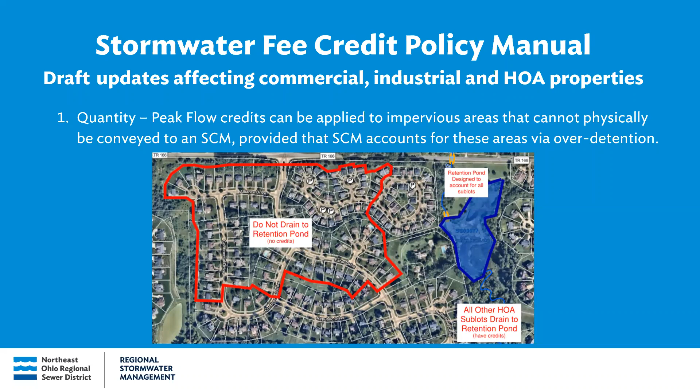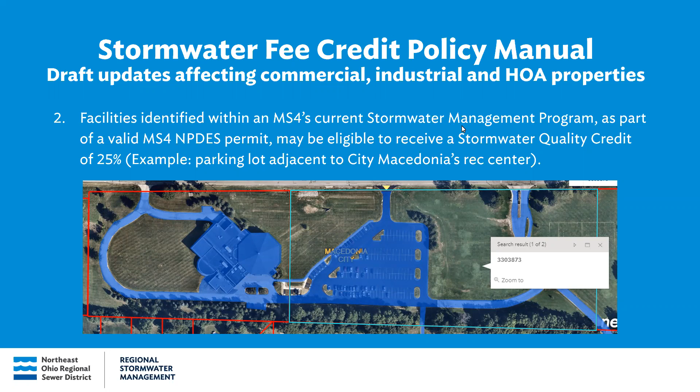This second update here, we currently have an industrial NPDES quality credit that allows companies to get 25% for complying with their permit requirements, that's that 25% credit on their fee for stormwater. We're going to be copying that program over to the MS4 NPDES permit holders, which would be municipalities, and it would be specifically for municipality owned properties that are billed. Most municipally owned properties aren't billed, they're city hall or service yards because they don't bring in funds, they're like nonprofit, they aren't billed. But there are some situations, very few situations, where municipal properties are billed. So for those properties, because you have your MS4 program, we're going to be looking to have a 25% credit. This is going to be a quality credit, and you will have to apply and renew annually. If you need more information, or think you might have properties in your municipality that would qualify, you can reach out to Chris Hartman at our office and he can help walk through that process with you.

Moving on to the report a flood tool. We pitched this at the last WAC meeting, if you recall. This is an easy fillable form that allows for data collection related to overland flooding or property flooding. This is something that service directors, engineers, office workers can all fill out. We have various forms of this, online forms, paper forms, Excel forms, you name it, we have it. We have this so that we're trying to collect data in a uniform manner across the service area.

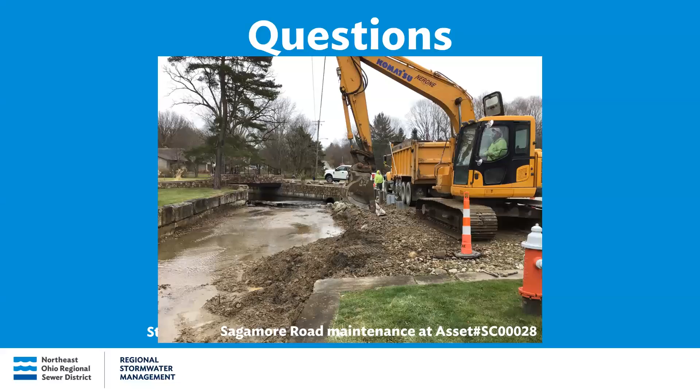Some background on Plum Creek: it's a headwater stream tributary to the west branch of the Rocky River. It starts in Brunswick, flows through Columbia, and ends at Olmsted Falls at one of the public parks. The sewer district maintains 3.6 miles of Plum Creek within the service area.

Some watershed characteristics: it drains 18 square miles, which is pretty big for a headwater stream - that cutoff is really at 20 square miles. 27% of the watershed is forested, 20% urban, and only 4% impervious, which is really good for that watershed.

Some background on how Ohio EPA assesses water quality standards - it's basically a completely biological approach, meaning the fish and the bugs that live in the stream. The fish have their own metric called the IBI, or Index of Biotic Integrity. The macroinvertebrates, or aquatic bugs, have their own metric too, called the ICI, or Invertebrate Community Index.

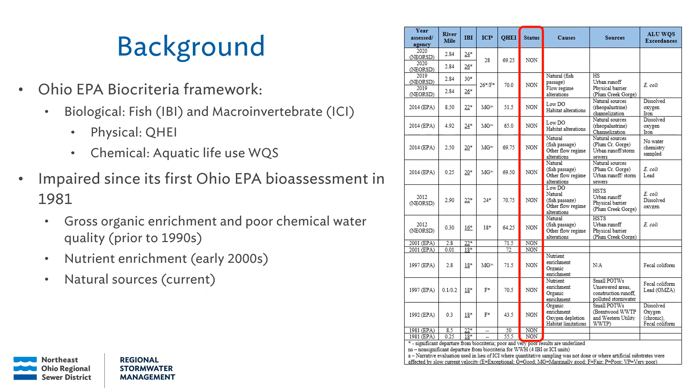The water quality improvements on Plum Creek have been pretty drastic. The organic enrichment problem was really dealt with starting in 1983, when the sewer district and the US EPA started regional planning efforts to expand our Southerly wastewater treatment plant westward. Our southwest interceptor, a really big trunk sewer, collects all your local sanitary sewers in your service area into one big trunk sewer that goes southerly into Cuyahoga Heights.

When that reached out and went online in 1997, it redirected flows from the Brentwood, Western Utility, and ODOT Park 339 wastewater treatment plants, eliminating over 500,000 gallons a day of treated wastewater to Plum Creek, which is significant since Plum Creek is a smaller stream. There's currently only one wastewater plant remaining on Plum Creek, called the Plum Creek Wastewater Treatment Plant. It's a real small plant, with an average design flow of 0.04 million gallons a day. Compare that to our southerly plant, which averages over 100 million gallons a day, so that's really small.

So that took care of organic enrichment. Moving forward, nutrient enrichment was really taken care of with the lead from the Ohio EPA. They created a nutrient-based total maximum daily load in 2001 for the creek based on the results of their 1997 assessment. What they did with that total maximum daily load is put restrictions and made that one wastewater treatment plant start reporting their nutrient levels. When they reported high, they were able to limit them to reduce the nutrient loading to Plum Creek. Our 2019 and 2020 monitoring by our environmental assessment section has demonstrated that Plum Creek is now meeting all the nutrient total maximum daily load target criteria. So both nutrient enrichment and organic enrichment were taken care of prior to 2019.

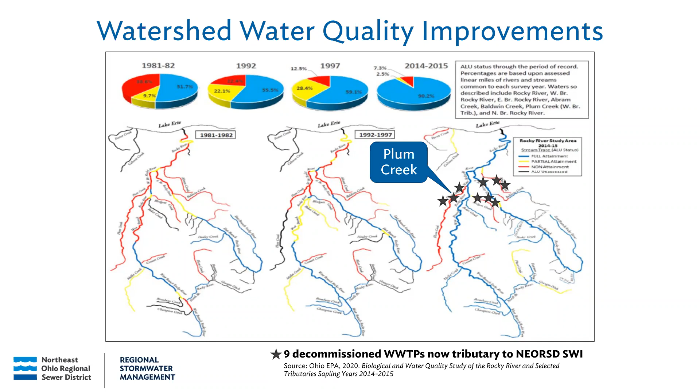5 of the last 6 assessments dating back to 2014 were in attainment for this metric. So we're halfway there - the fish aren't meeting, but the macroinvertebrates are. These bugs, when they hatch into adult life form, can fly above the fish barrier, which is the Plum Creek Falls, which I'll show you in a minute. They can fly up there, recolonize, and start a new population. They're not limited by any barriers.

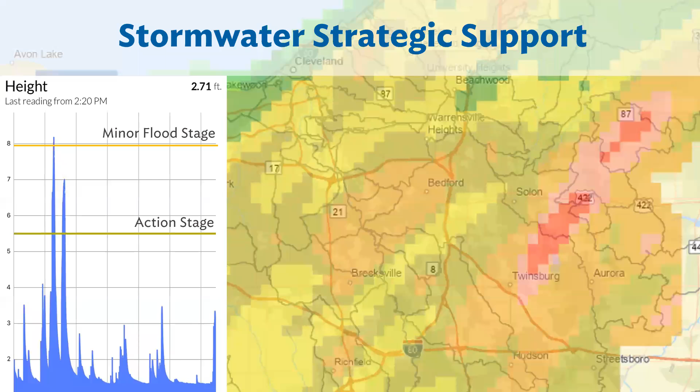So I have two topics I'm going to be covering with you today. The first is how we use monitoring data, or various types of data, to support our urgent storm event response. The second is how we've been taking completed master plan stormwater models and extending them into the local system to help address local issues while looking for regional opportunities.

Regarding the first topic, as you've learned through different WAC presentations, we've covered the steps involved with our urgent storm response. Today I'm going to talk about the different types of data. All this information is useful to track both what's coming, what happened, and where we're going during the course of a storm event.

Some of the data we use is rainfall data. We have 30 rain gauges throughout the district service area. Our 30th was recently installed at our Westerly treatment plant. We also have a lot of gauge-adjusted radar data. This figure on the right shows the coverage area, a little over 1,300 square miles, covering not only the stormwater service area but also what drains into it to support our analysis.

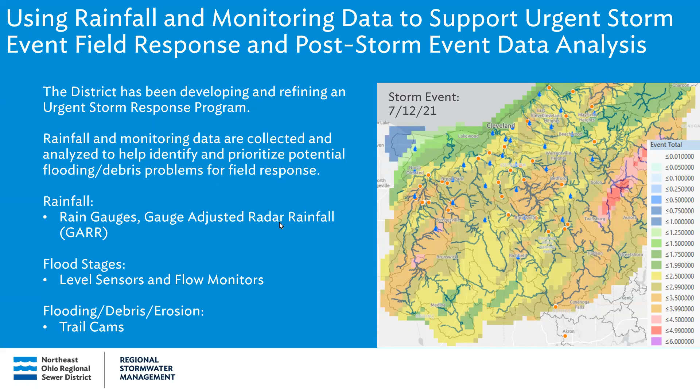We also have a number of monitors installed by the USGS that we support and fund, our own district monitors, as well as some outside vendor monitors. We'll go over that as well. And lastly, we have a number of different trail cams that we use to collect photos and compile those into videos to help us understand flooding, debris, and erosion.

Regarding the district rain gauges, once again there are 30 installed. We're able to quickly extract that data and process it into what are defined as recurrence intervals, for the different durations shown on the left: the peak 5-minute, the peak 10-minute, up to the peak 48-hour duration of the peak rainfall amount that occurred.

We compare that to two different references: the Huff and Angel series of rainfall frequency for the Midwest, done in 1992, and the NOAA Atlas 14, done in 2004, to give us a good idea of anything from the 2-month recurrence interval up to the 1,000-year recurrence interval.

We do that for each rain gauge for each storm event to give us a sense of where we have high intensity rainfall versus heavy rainfall. High intensity is typically at least 1 inch per hour or more, and heavy rainfall is closer to at least 2 inches over a 24-hour period.

You can see on the table for the Westlake rain gauge that for the shorter durations, the 5-minute to 1-hour, there were relatively small amounts of rainfall that didn't statistically jump out. Whereas for the longer period, particularly the peak 12 and 24-hour, it was closer to a 5-year recurrence interval, which is significant. The figure on the right also shows the cumulative total of that rainfall.

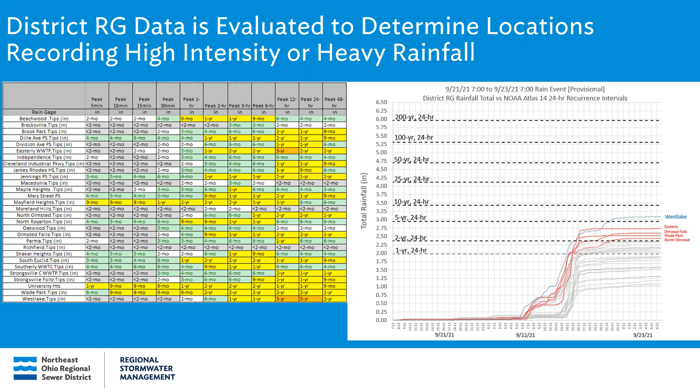This gives us a better sense of how the system responded. As you can tell with the Westlake line graph, it shows how much rainfall occurred compared to that 5-year, 24-hour total, and you can see when most of it occurred during that storm event.

In addition to the rain gauges, there's this gauge-adjusted radar rainfall, which the district has been collecting since 2016. We have 1 kilometer by 1 kilometer grid data collected at 5-minute intervals. Similar to the district rain gauge data, we compare all of those for equivalent peak 5-minute to 48-hour time steps, comparing to recurrence intervals to answer the same types of questions.

On the figure to the right, this is for the peak 30-minute duration, and colors closer to yellow and orange indicate higher intensity rainfall. You can see an area on the left with some orange blocks indicating it was closer to a 10-year type recurrence interval, and it happens to be the same sub-watershed that Justin talked about for Plum Creek.

There's a USGS rain gauge or stream monitor included there, shown in the figure in the upper left, which indicates the water elevation exceeded the action stage and actually met the minor flood stage. That's an indication there was high water, possibly some flooding, which would have prompted us to do a field response there.

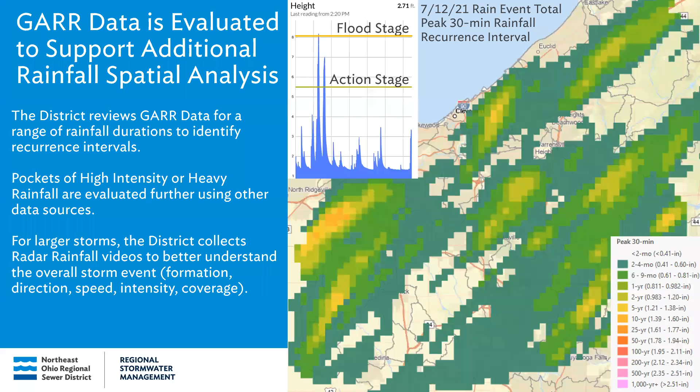With the different monitors, we have roughly 80 across the service area between the USGS, our own, and some outside vendors. We are slowly building towards getting all 80 of those to define what I think is a very useful approach that the National Weather Service uses, which is defining flood stages.

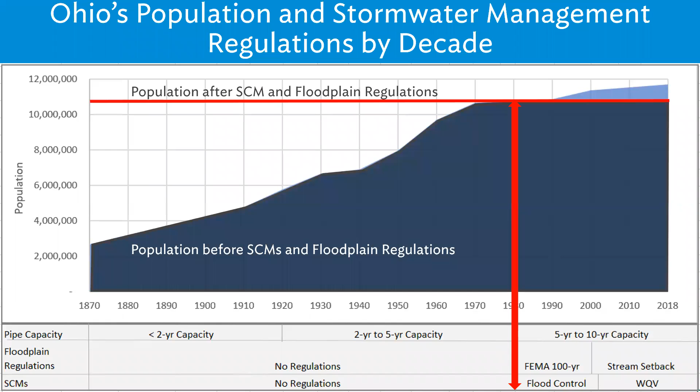Thank you. So one of the other challenges here, outside of everything we talked about, was the types of soils and the topography. It's very poor drainage soil, more silty clay, and a very flat sloped area as well. The slope itself is closer to 0.2%, 0.12% in some areas, so it's a very flat area, and once the water gets there, it takes a long time to draw down.

Based upon that, and compared to our master plan model focus, we decided to do a lot of expansion to better understand the local system, how the regional system may influence the local system, and equally important, how we can develop solutions in the local system that might benefit the regional system. The table on the right gives you an idea of the level of detail the master plan model was originally at versus where it's been extended to date. The model catchments were roughly 76, with an average catchment size of 33, which is a very good size.

But as you can see to the right, we wanted to understand at both the catch basin level how the system was responding, as well as at the parcel level for the non-residential, commercial and industrial areas, the potential solutions we could develop as part of this project. From a modeling perspective, on the conduit size, we had a little over 53,000 lineal feet in the original model, and we extended that to nearly 250,000 feet.

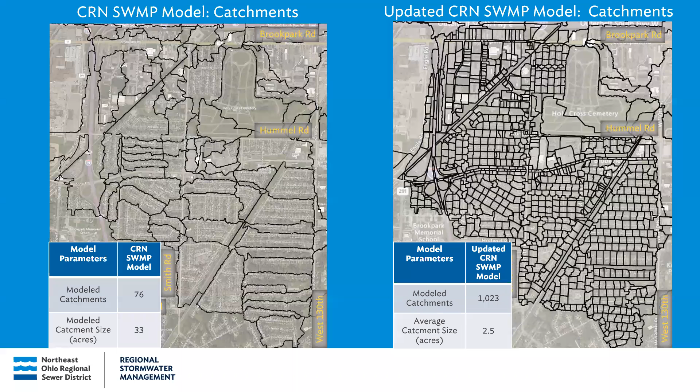The figure on the left shows the hydraulic model extents, most of which was primarily the regional system. The figure on the right gives an example of how we extended that further into the local system, not only to understand some of the original projects the city had proposed, but also some ideas of additional projects. I'd like to emphasize how cooperative the city was with providing drawings, very open to different types of solutions, and something we're working together on.

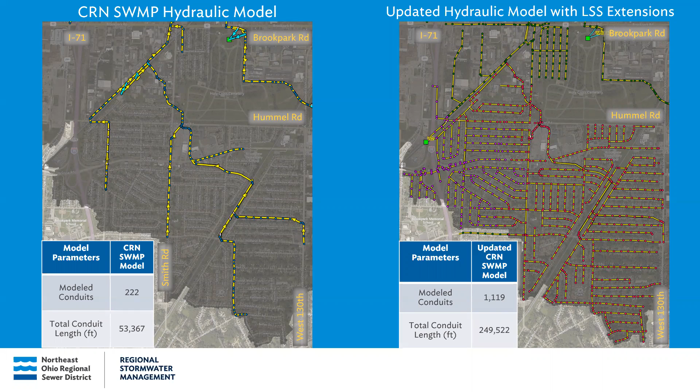Next slide, please. I think the bulk of the projects or potential solutions will really be focused more on storage, as I mentioned before, because so little of it was required back in the day. There are three types of storage solutions we're generally looking at.

There's the inline basin that you'd normally think about, but for that to really be successful, you need to think about the elevation difference to allow ponding without impacting the local system, which, as I mentioned, is a very flat area here, so it's very limited.

There's also some conventional offline storage being looked at, but the challenge there is you also have to have enough area to divert the new storage into, and with this fully developed, heavily culverted area, that's once again another challenge. And then finally there's the more decentralized approach with potential underground storage and bioswales.

It looks like there's great application there, but it's both technically and financially challenging. With an area like this though, it looks like it might actually have the biggest potential, and it's an area we're currently exploring.

So where we're currently at with the model is we've got three different monitors in the ground recording different stages, and we're getting some field response during the bigger storms. We're near completing the model calibration, and then we'll be moving into problem definition and alternative development.

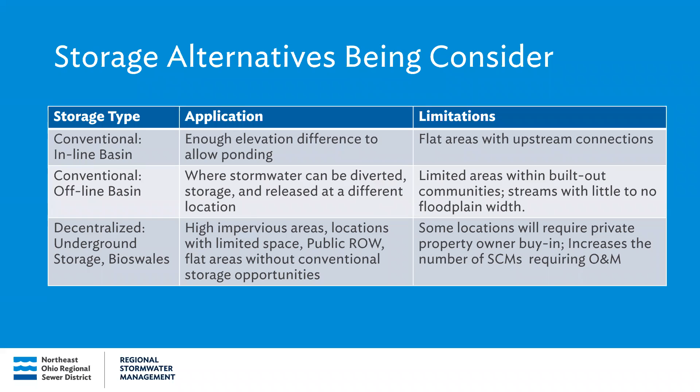Next slide. With that, I'll answer any questions there may be.

I do not see any questions right now, George.

Okay, with that I will hand it off to Rachel Webb, one of our project managers, to give an update on the Cuyahoga River South Stormwater Master Plan.

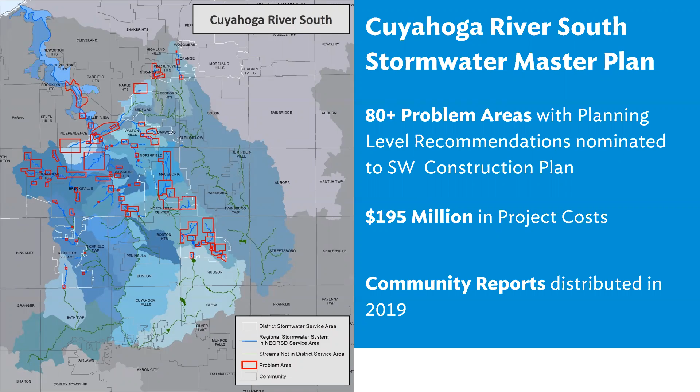The community reports were distributed way back in 2019, seems like a decade ago. With that being said, it's not a plan that we've put on the shelf and walked away from. If you move to the next slide, we actively use that plan to funnel projects into stormwater construction planning.

Those projects are scored and ranked. With the projects outlined in the master plan, here's just a snapshot of a couple we have active in this Watershed Advisory Committee area.

So a couple of Chippewa Creek projects there, one looking to start construction next year. Excuse me, one that is in the process of acquiring easements and soon to resume design. They paused to do that easement acquisition before finalizing design.

And then you have Brandywine Creek down in Hudson. This is a project being led by Hudson, and it's looking for construction in 2022. And Bear Creek up in North Randall is also looking at construction in 2022.

So I just wanted to keep that to the forefront, right? We do use these master plans and are continuously moving projects into design from them, or to activate.

Next slide, please. With that being said, we do have problem areas identified from the master plans that are complex, or whose cost estimate is above a single project that could be completed — upwards of 12, 15, 20, 30 million dollars, right, which is not something that can be done in one shot. Or we require additional information to understand the full impacts on the regional system.

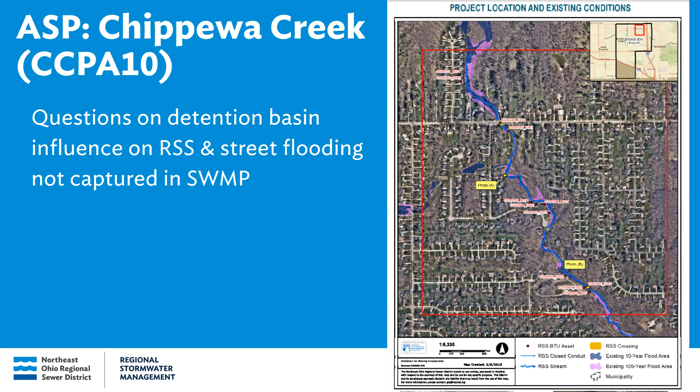To answer those questions, we needed to do some additional analysis and look at the model. Through this advanced planning process, we built out the model further. We added additional information and detail into the model to better capture what's happening in this area, and we did see the expansion of some flooding areas. What it resulted in, though, is that flooding not captured in our model is a result of local infrastructure, not necessarily the regional stream causing the issue.

So there's a lot more conversations to be had. We also highlighted that the basin, modified or not, doesn't have as much influence on the regional system or potential benefit to it. So we're able to answer some of these additional questions that come up in advanced planning, and this is just one example of that.

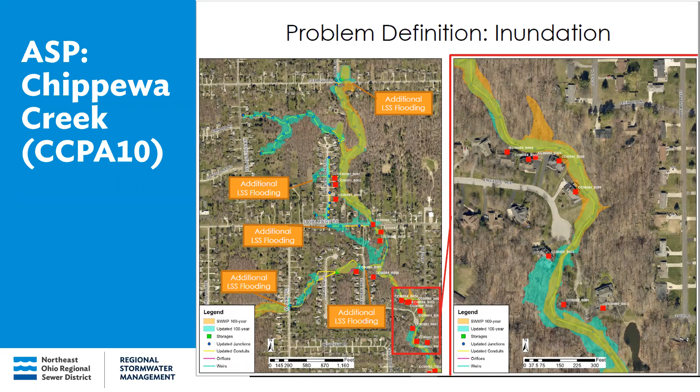I am short and sweet today, so I don't have a lot. We're just continuing to move along with the advanced planning. So if there are any questions for me, I'd be happy to answer them.

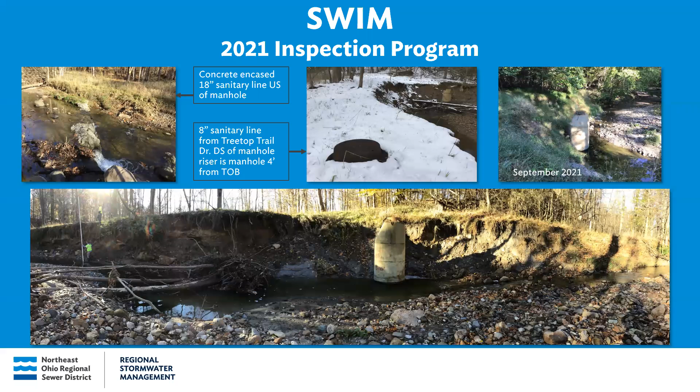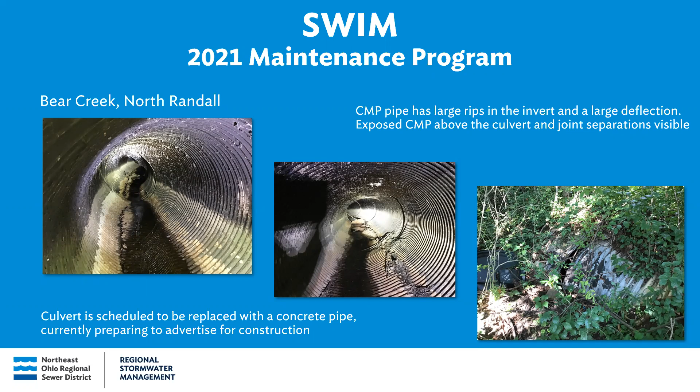A summary of our maintenance work so far this year in the Cuyahoga River South: we've completed 15 total maintenance projects. 14 of those included 653 cubic yards of debris and 72 cubic yards of sediment removed. The other project listed would include things like demolition, small scales, or tree removals. This one project is attributed to a demolition, which I'll talk about in a couple of slides.

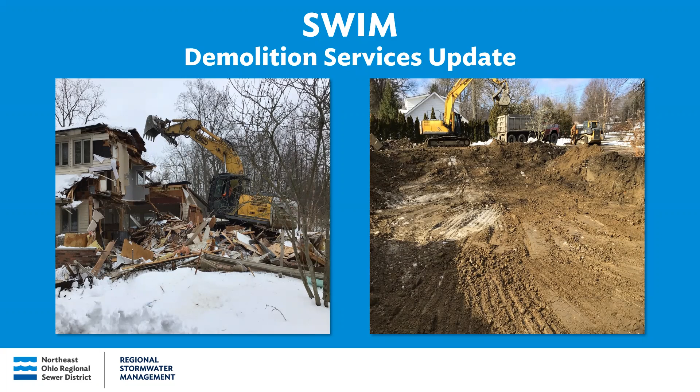The asbestos survey and demo contracts were awarded and began this spring, and projects are being prioritized based on how long the property has been vacant, as well as the project timelines the parcel may be included in. This is a photo of the home on Forest Overlook in Seven Hills. This home was in close proximity to an eroding stream bank and is part of a planned project. We removed the house, the driveway, the foundation, any sheds that might have been on the parcel, and then graded and reseeded the site until it's time for the larger project. So far we've removed 4 homes and there are 3 in the process.

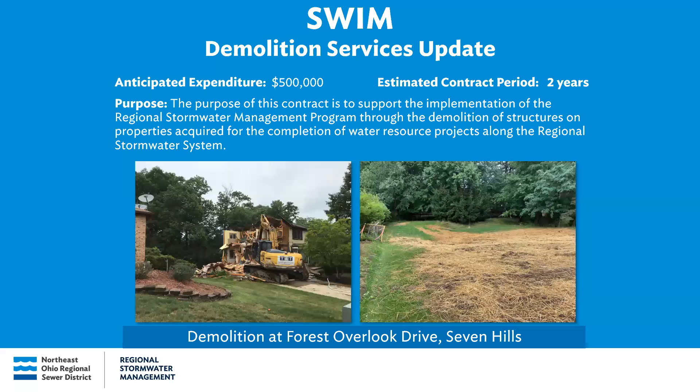And I think with that, I'll take any questions if there's any in the chat.

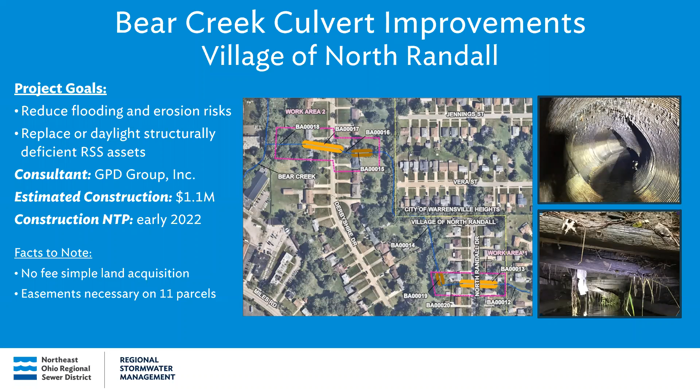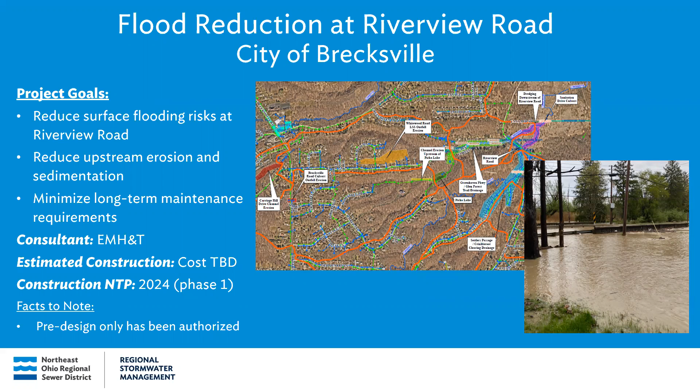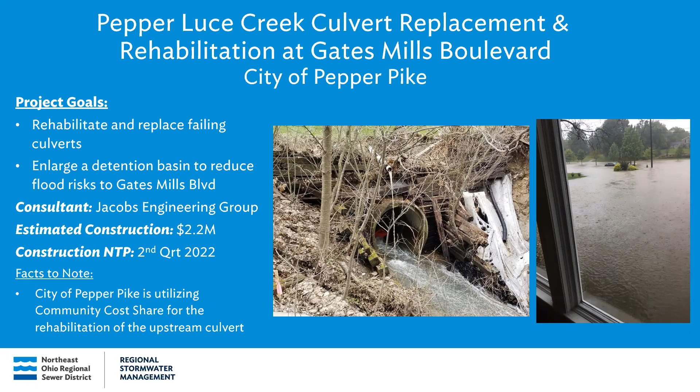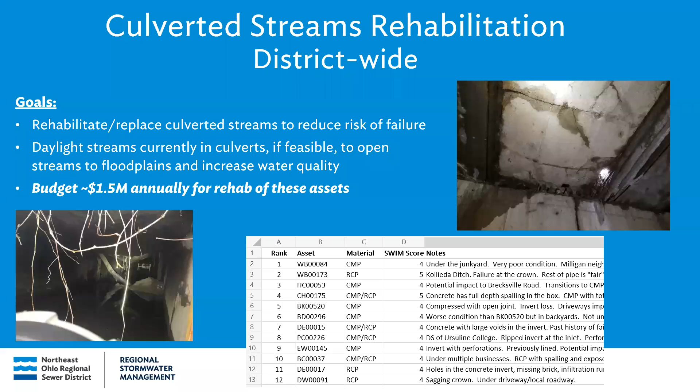I think that comes to the end of the design slides, and we're going to go into a couple of construction slides now.